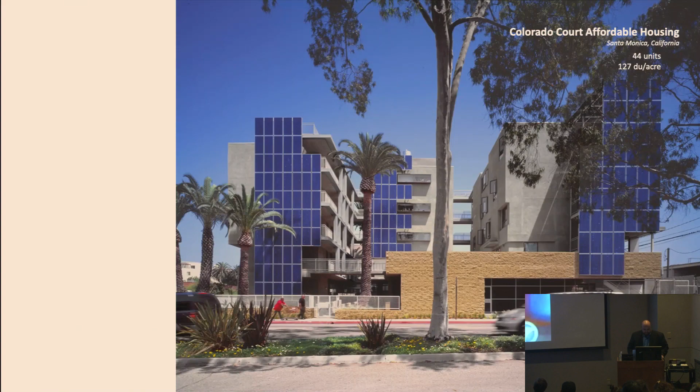It is nearly 100% independent from the power grid. It was built by an architect who specializes in... A new building that is energy conscious is now going up in Santa Monica, and it's getting a lot of attention. Channel 4's Patrick Healy is there. At first, it appears to be any new apartment project, just another building noisily being put up on a Santa Monica corner lot. But Colorado Court is in the... One of Leo's personal passions is finding out ways to provide environmentally safe housing to low-income families. Take a look. We're standing here at the first green affordable housing project in the country. This is Larry Scarpa, the architect. Why don't you... You get the picture, right?

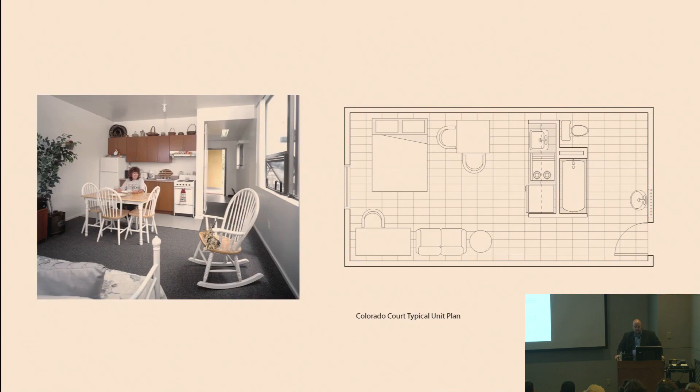It was kind of tremendous that it got a lot of this attention for what was one of the first affordable housing projects in the city of Santa Monica. We were really investigating this tight, micro unit development before micro units even became a kind of fad. But this was the best way we could build affordability. Interestingly enough, this building was designed to be completely off the grid. 100% of its energy needs were produced through the building, most of it through a micro turbine on the roof, and about 20 to 30% of it through PV panels.

If you know how to design in a passive way, that was the first strategy we had here. Anybody ever heard of alphabet buildings? We used to design buildings before air conditioning in alphabetic shapes as plans. This is one of those kind of buildings, and the building has zero AC in it.

It's actually only about 2 blocks off the ocean, so that's one of the beauties of working in California that I don't quite have in Florida. We have a little more humidity and heat in Florida. But this building was really designed to kind of shade itself, to create a brise-soleil.

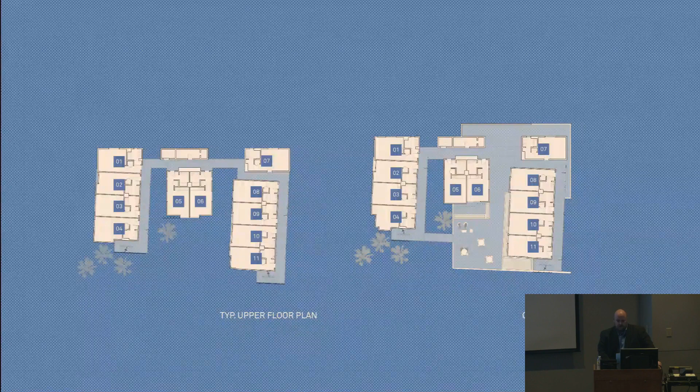Here's that alphabet shape, this one was formed in an E pattern. We always think about sustainability and these integrated practices our buildings should develop. So you see the photovoltaic systems, the shading, the way we could harvest rainwater, thinking about stewarding that on the site, as well as materiality and other aspects.

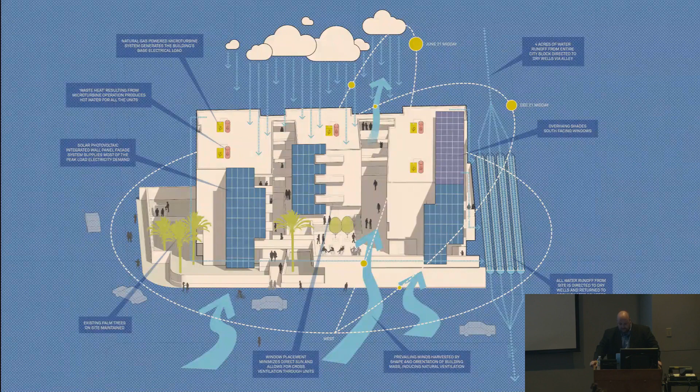That was the huge challenge, but it was the way that the codes, the regulations, and all of these things that get in the way sometimes of our design got in the way of this project. Even though we were doing the best things, it won all of these awards.

So Larry and Angie, interestingly enough, formed a nonprofit organization called Livable Places, where they started writing policies to begin to think about how we capture and adapt the built environment to allow for something more than just a single family residence, but also how we begin to think and plan for the town, a kind of townscaping. How do we begin to look at walkability, livability concerns, and integrate those?

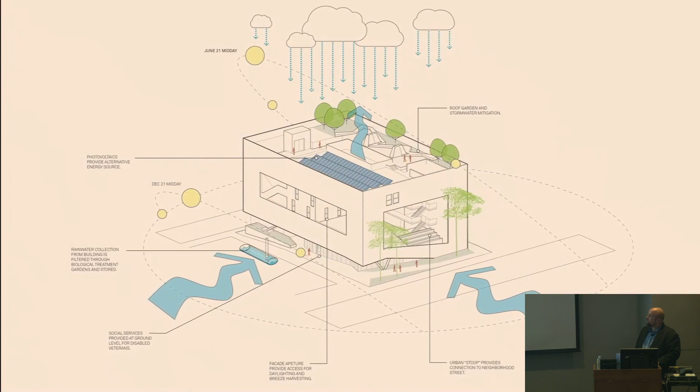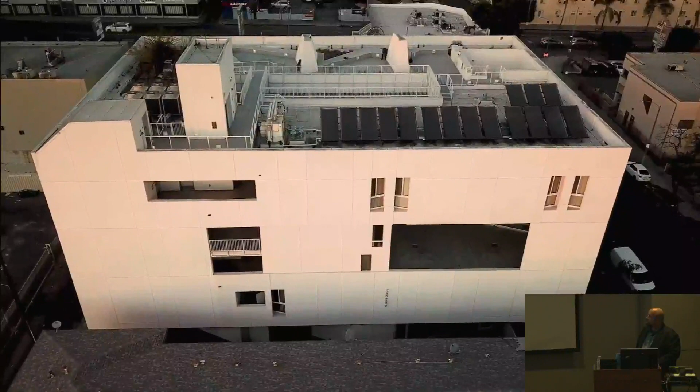Design can be used creatively as a solution to ending homelessness, no matter where it exists. So this is a rectangular shaped building on a rectangular shaped lot. Nothing terribly unusual about it, pretty commonplace actually when you think about it. But I think it says you can do something really imaginative and creative in crafting that solution, even on a plain old apartment building lot.

Angie mentioned that the facade of this building is actually a space, which is the first time I heard her describe it that way, and I thought that is really interesting. The facade is actually a space. This is a great looking building on this block, even without homeless folks in it. The fact that homeless people live here, I think, once again promotes a very positive depiction of what supportive housing can and should look like, in my opinion.

I used to sneak into McDonald's and stuff, like after the restroom, and go in there and take a bath. My pride was really bad, to just go and say I'm homeless.

This building is marvelous. So I have family come visit. We have a community room. Like, you want guests, your guests don't have to be inside your home. They can be inside the guest room, enjoy your company for a couple of hours, and send them on their merry way. We created an aperture which was lifted up above the street so that it appears really open. There's a visual connection to the street, but not necessarily a physical connection. You can come up on the roof and just relax your brain and get your thoughts out and make yourself better. This building right here will make you a better person.

So we're really architectural critics. The thing about this work too is that we're always looking at precedents, and courtyard housing in Los Angeles is absolutely fascinating. It's pretty fascinating in most tropical as well as the kind of climate that Los Angeles has, in the sense that they really create a cohesive unit. It's almost like a handshake measure, another layer that comes from the street to the home itself or to the unit. So we're always looking at how do we layer space, how do you create these kind of handshakes.

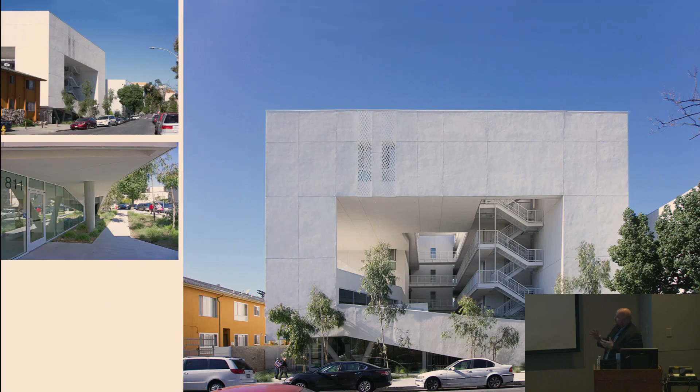You can see some screens—some buildings have them, some don't. These are some of the elements we were able to add back in once we realized we had some budget or money left over to do that.

I'm going to talk a bit about the Cherokee Studio. This is where we were really trying to experiment with how to make an interesting building—how can the building change and have this kind of ephemeral nature to it?

So just a simple structure of these louvered screens allowed us to open and shut and close, creating a dynamic where the building could change over the course of a day, months, or years, and opening up to allow for that ground floor use.

These were, again, courtyard buildings, but there are lessons we learned even on this one. We had a developer who was in a budget crunch during development who wanted to just take the screen off. We said okay, sure, we could take the screen off, but that's where all the architecture is. We showed him what it looked like.

He said, wait, since we now have all this solar heat gain hitting the building, we need to redo our energy calculations. We found it would cost $100,000 to put this screen on, both the front and back, east and west side. It actually cost another $150,000 to upgrade the mechanical systems without that screen, plus some other added costs. So the client ended up saying, for $100,000 I get this, and we were able to show how you value architecture.

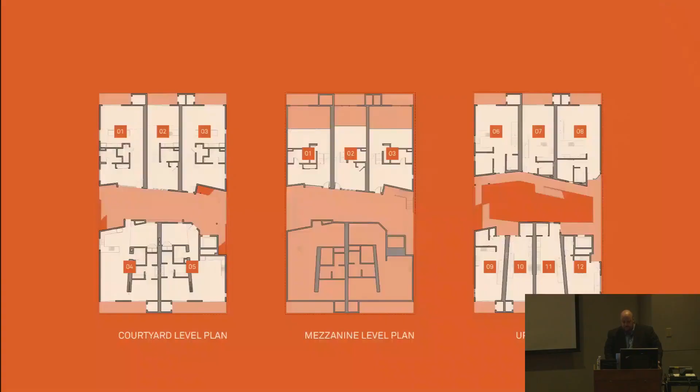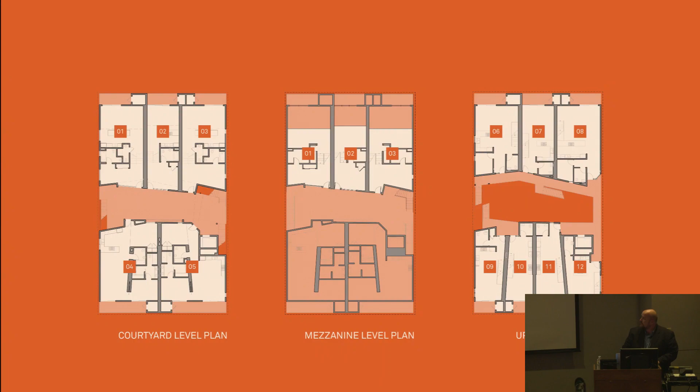So these are just some of the floor plates. You see there were single-story units and double-story units called maisonettes, with a courtyard in the center. In the front and back are those porches covered by the screen. And this is just an interior shot.

What's interesting is you came up to the third floor of the unit, then went downstairs to your bedrooms. The other funny thing we did was recycle skateboards for the backsplash of the kitchens, one of these fun elements where we're trying to recycle materials and get them integrated into the design.

One of the things Skid Row Housing asked us was to innovate, and one of the challenges was to modernize buildings. We were asked to modernize this building, which doesn't always have design, but we were trying to find whatever we could as a design option. This was from the 1920s and was being utilized for affordable housing.

It had these courtyard elements that we were really interested in as design opportunities. Even though we were upgrading some of the mechanical equipment, we found these courtyards as that kind of primary space.

This is one courtyard we came into, which was really being used as bike storage and had some seating, but we got it to where it still had outdoor seating. The thing is, it was the fire egress, so we worked with the fire department to get these stairs up against that wall, and then a gate to get outside. It was a very simple feature we designed to get this in, really making it a piece of furniture for the community.

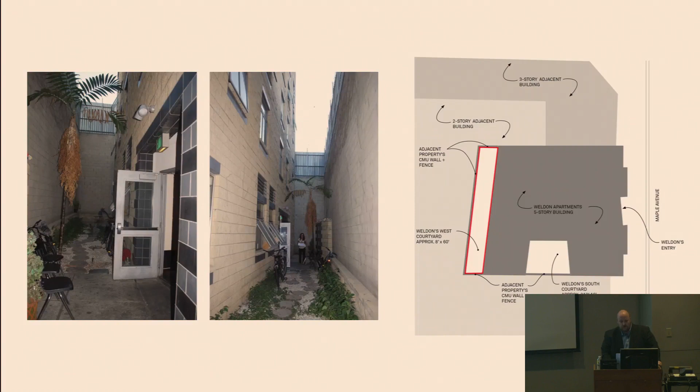Then there was another slotted courtyard, which was really just a trash hole. Everybody was throwing trash from their units into this space. This was where everyone went to smoke cigarettes, even though they weren't allowed to, and it was just a really dismal, trash-collecting space. You can see it's pretty tall, pretty dark and grim, so we were trying to figure out what we could do to begin to upgrade that.

So what we did was, first thing, redo the ground to make it actually live seating areas and paint it white, and have these potted plants we designed to hold. In each unit, there were potted plants, and what we were trying to do is make all the residents have one plant they could kind of hang out with. That didn't work so well, but they found a few residents that would take care of all of them.

You can kind of see that we were trying to reorganize the bike racks and other elements in here, really through very small means, exploring opportunities in this project, to the point where there was also a collective cooking area, this commercial kitchen we went ahead and revamped as well. You can kind of see that last courtyard I was showing through the doors there.

So all of this really created this kind of communal space and opportunities that they could then leverage and use. Now it's heavily used, it's a loved space, and it's become more popular, and not so much garbage being thrown into it anymore.

A project we just recently finished is called the Rose Apartments. It's 35 units, and it's actually done for transitional aged youth. If you're not familiar with that term, the issue we have in homelessness is that the homeless population isn't always adults - it's a lot of children, especially under the age of 18, that are going homeless, and they transition from 18 to 25.

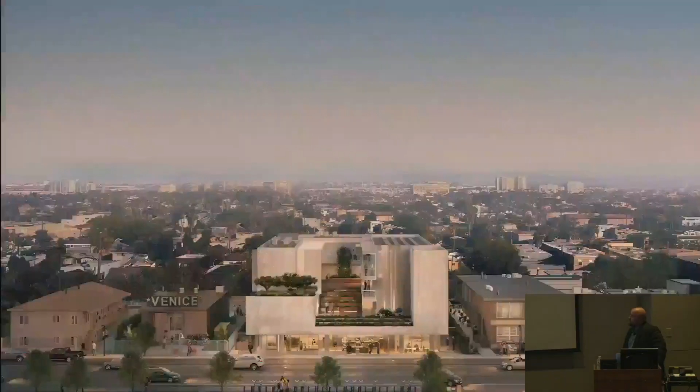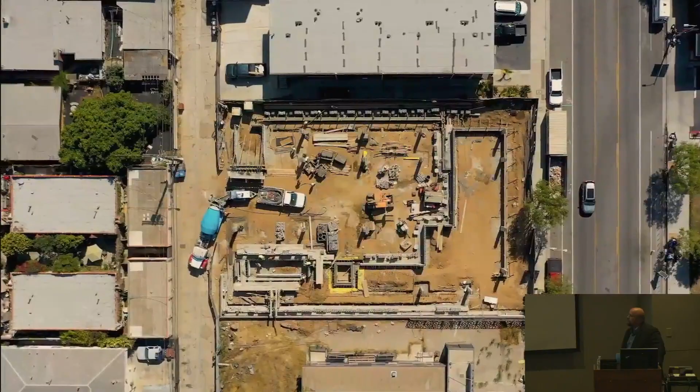Doing affordable housing does not just happen overnight. Rose Apartments is, first of all, the first ground-up construction that has happened in Venice in over 20 years. The second thing is that Rose Apartments is 100% supportive, and that is a huge deal in the city of LA. Rose Apartments is going to house 35 families. Half would be for families and individuals who are experiencing homelessness.

There are folks in the community that don't want developments like this to happen. They have a lot of perception about unhoused people living on the street currently and how they transition into housing. They have a lot of negative thoughts and ideas about who are living in our buildings, and these things are just not true. We're excited to be able to give some unhoused folks the opportunity to live by the water and experience the beach, to have the same experiences as everyone else in Venice.

So I was always fascinated that you had this thing, NIMBYism. I never heard of it until we went to these public or community meetings here on this project, where it was just like 'not in my backyard,' amplified to build nothing anywhere at any time.

This was kind of that quintessential project she was talking about. There's been nothing in Venice Beach built from the ground up in the last 20 years - it's all primarily been renovation work. So this was a key project for us with this particular housing authority to build these units.

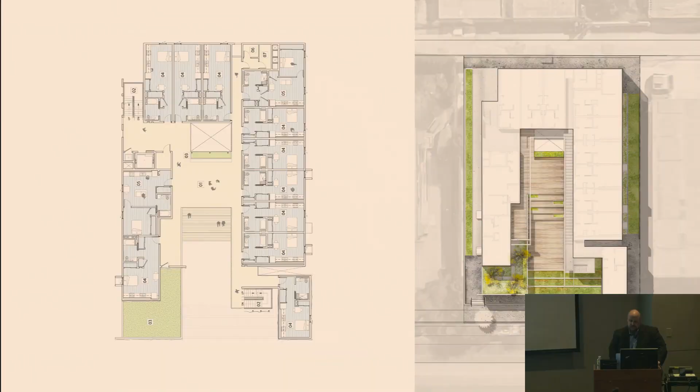Here's some other images of that courtyard space that's heavily used. Everything actually fronts that. Nothing really fronts the street. They all front the courtyard, and then the courtyard fronts the street. So you're just getting some views from that over top.

But what's interesting is, when you look at it from the street level, it really feels like a sculpture. It feels like this kind of sculpture element. And it's kind of funny, you can see a little bit of the sparkle grain we've put into this building.

Larry always said when he opened up, he wanted to be playing Liberace as you walked down the street, because it does sparkle in the sunlight when you're walking by. But we were really trying to think about it as a public art piece that people could enjoy, so you're almost living in art. That's where these volumes and other elements became more volumetric rather than mass.

Just some other images showing some of these aspects, where we're even thinking about how we tie the land into the building, keeping it as simple as possible and as affordable as possible.

And so this gets some incredible views. I call it the Pope's pulpit up there at the top. You have incredible views back to the ocean, but also to the mountains beyond, the mountain range or the hills beyond. Here's another view looking back from that area.

All of this has kind of coalesced around this idea that we began to pull together through research of this density exhibit that we put on, which really allowed us to explore, analyze, and reflect on our own work, just like any art gallery or art studio would have with these kind of exhibits.

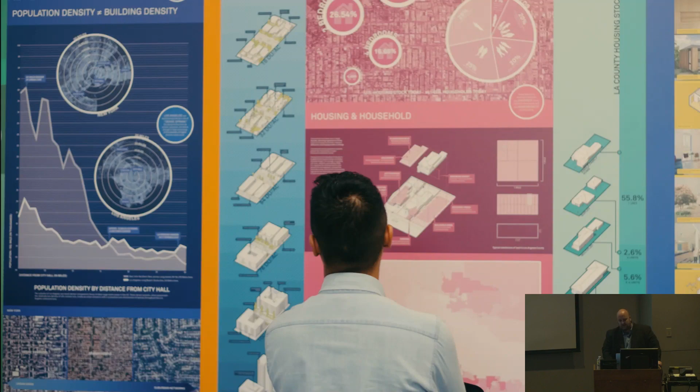I'm always fascinated when we get into these conversations, because density always becomes a bad word, but we really need to look at density. Maybe we use a different word, intensity—some even use that term when talking about FAR, floor area ratios, referring more to the intensity of building uses. But I want to point this out, and this has been an amazing statistic from a report that came out of New Urban News, of all places, back in 2010.

What's important to note is at that point, the tax base for the buildings and that density starts to pay for basic infrastructure. What we don't always think about in cities is that unless we have these 2, 3, and 4-story mixed-use buildings, the type of land use and tax base you're getting never recoups enough to pay for basic services like police, fire, water, sewer, let alone fixing potholes.

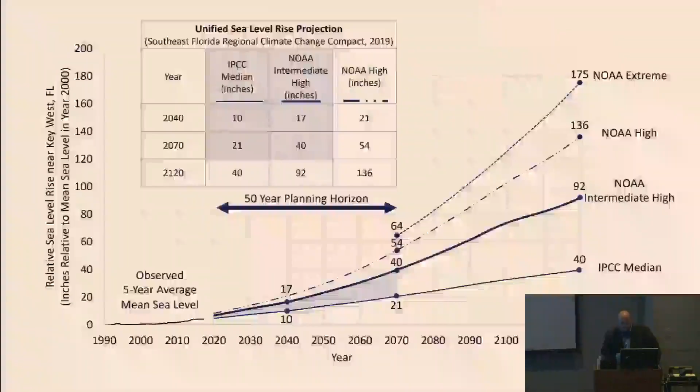Oop, I don't know why I just did that. That's crazy. It was weird.

I'm going to touch on something I added just here at the end. I wanted to talk about where we're engaging in South Florida right now on a project I refer to as salty urbanism - that's its pedestrian term. It came out of research I've been doing through the academy, but also with our office in professional practice, and we're really trying to bridge that. As I pointed out with the regulation and policy changes on the housing projects I talked about at the beginning, we're trying to do that now also within the broader built environment.

Salty urbanism is a pedestrian term for what the project calls ADAPT, an acronym for a design and planning tool for these coastal areas and how we begin to think about them.

It's doing it again. It's crazy, I hope it doesn't. I'm going to try to advance it a different way next time. Nope, didn't work. I don't know why it's doing that.

I apologize, but I wanted to put this out - it came from Zillow. If we had just 6 feet of sea level rise over the next 50 to 100 years, we're going to have 2 million homes at risk. If you look at my state, Florida, half of those homes are in that state alone. This is really going to become a challenge for us as we advance into the next few years.

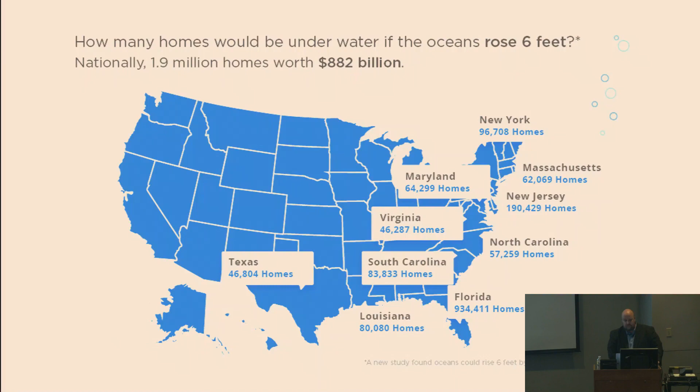It's doing it again, I'm not going to stop that. I don't know why. Maybe I'll just skip it all.

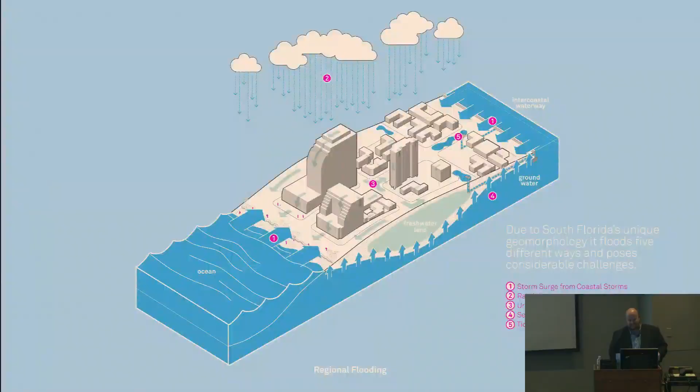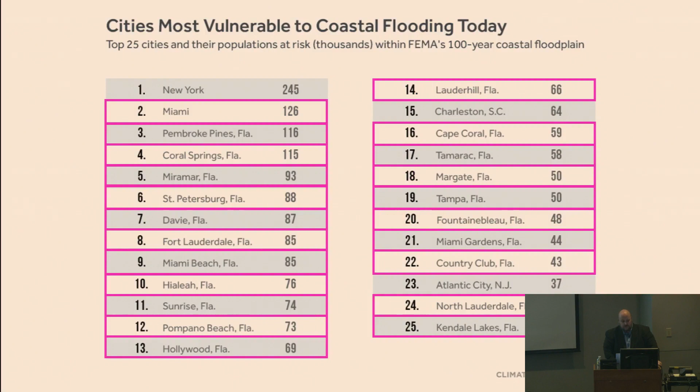This is going to skip, I can tell you right now. See? Yep. But the point is, I'll advance it - we're having all these challenges.

There's the seasonal high tides we call king tides. This is the roadway during one of these king tide events right now - an abnormally higher tide. The streets do this, and just like you'd see with boats, we put out signs now like idle speed, 5 miles per hour. Funny thing - a guy who owned a Ferrari sued the city of Fort Lauderdale, saying they ruined his Ferrari because he drove through salt water. It went into this huge thing, but ultimately it was ruled an act of God, the city couldn't be sued for it, and the guy got angry and moved away.

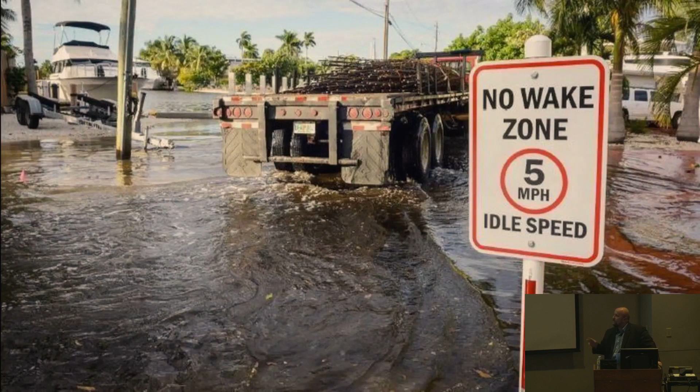But the funny thing is, in these communities that are very susceptible, Fort Lauderdale is going to have to figure out how to adapt. Interestingly, Fort Lauderdale is always kind of the redheaded stepchild to Miami, and specifically Miami Beach gets a lot of attention, but Fort Lauderdale is even lower and has a lot of these basic issues.

This is a storm surge like we saw with Irma - something we could pretty much see with Ian if it gets close enough, or elsewhere. I am trying to get back home at some point, but this is kind of the interesting thing, and again I apologize for that.

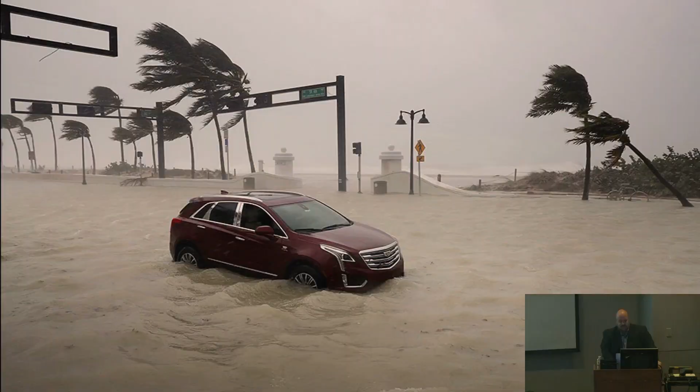We had just spent about $30 million renourishing our beaches before Hurricane Irma. This is what happened about three months after that renourishment.

The reason it happened is because we got rid of all the dunes, which are essentially root dunes. We call them sand dunes, but they should really be called root dunes, because the roots are actually what holds the mass there. All this sand came about two to three feet of it over onto A1A. This sand could not be picked up and put back on the beach because now it picked up all these hydrocarbons and became a toxic, carcinogenic mess and actually had to go to a landfill.

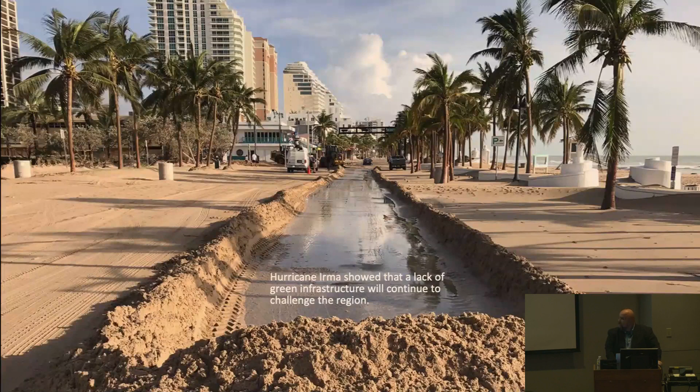You can see how we spend money and how we think about these things that are going to become challenges in the future. Part of this project was to really think about, not necessarily inventing new ways, but how natural systems used to work in this community.

And so, it was just after Hurricane Irma. This was 7 inches of rainfall that fell in an hour period of time in South Florida, and you can kind of see the devastating aspects there.

Oh gosh, all right, I'm getting sick of it.

If we can figure out how to not let the built environment become a toxic mess because of the flooding and everything, this is going to be a challenge.

One of the things we asked in this project was, if this is truly what is happening, let's think about a scenario vision for it. Let's not think about this as a problem, but as an opportunity. How do we begin to think about future heat and future flooding in a different, more creative way that allows a different lifestyle to emerge, one that may live on with and over water?

That was a series of workshops and exhibitions that we curated throughout the communities to have this long conversation about what this could be. There were also collaborations in different design studios at USC, University of Southern California, as well as University of Kansas and Florida Atlantic University, all collaborating to develop this with multiple design and architecture firms, like our firm, to coalesce around a vision.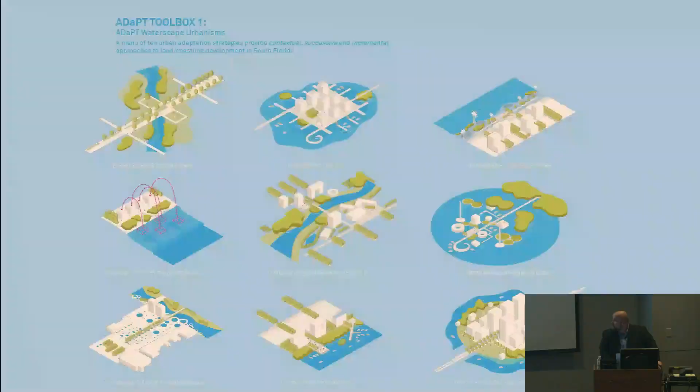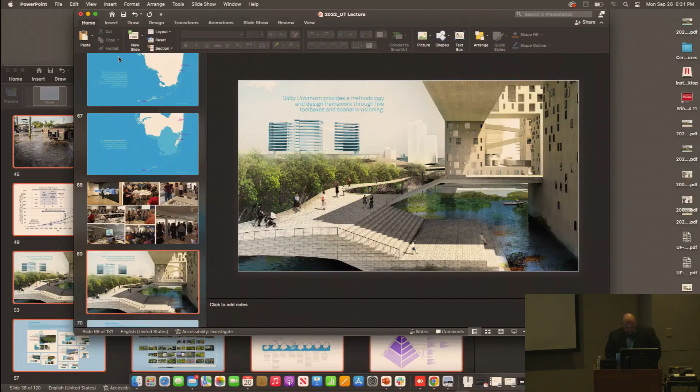Wow, I don't know why it's doing this now. Now I'm getting angry. Sorry. Let me do something else here. Let me just see if resetting it works. Nope, all right. Oh boy. Yeah, this is not the one I wanted. Apologize, having technical difficulties.

I'm going to try to just do it as best I can. So what this really wanted to be was a new methodology and a framework for how this idea of salty urbanism could coalesce around 5 different elements.

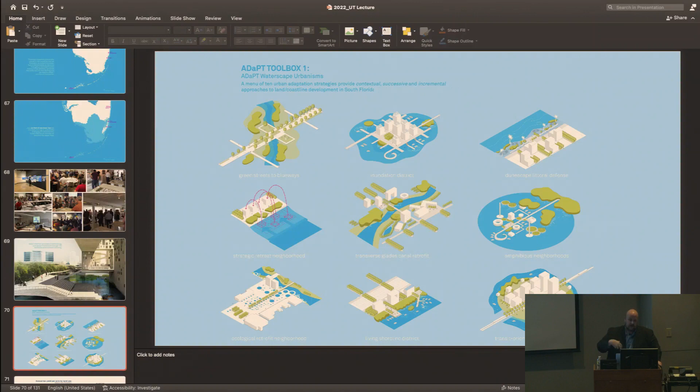Those elements began to become, one, an adaptation toolbox around what we call waterscape urbanisms. How do we begin to think about the built environment that was there now, and how do we retrofit that, as well as think about new developments that may be coming in the future? Again, how do you live on, with, and over water? How do you create floating structures, or move things to higher ground, and other elements?

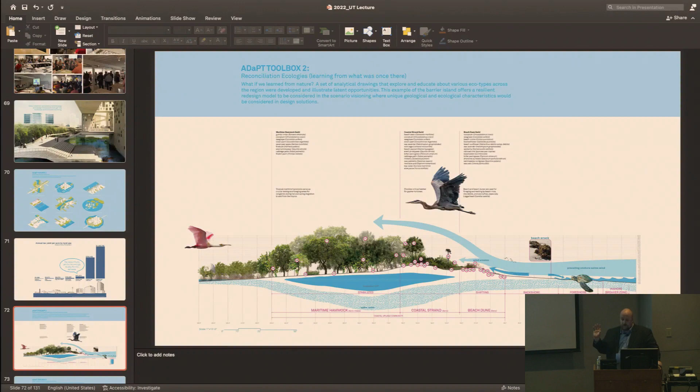Then we created a second toolbox, which was just looking at forensic ecology, trying to figure out what was once there before. So we understood the hydrology, ecology, and geology of those specific areas. In this case, it happened to be the barrier island that we were working with.

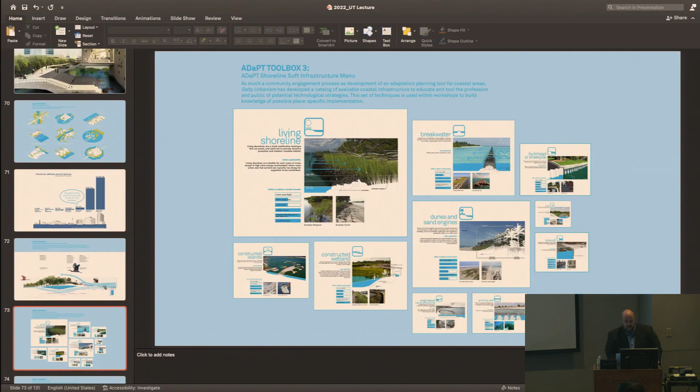The third toolkit was looking at what kind of infrastructure adaptation technologies we had at our disposal that we could explore and utilize. This included things like living shoreline, breakwaters, and other elements that were commonplace. There's nothing novel about this individually; what was novel was putting it all together as one integrated system.

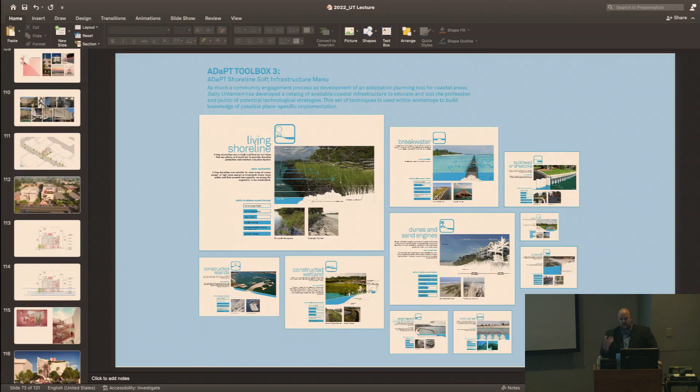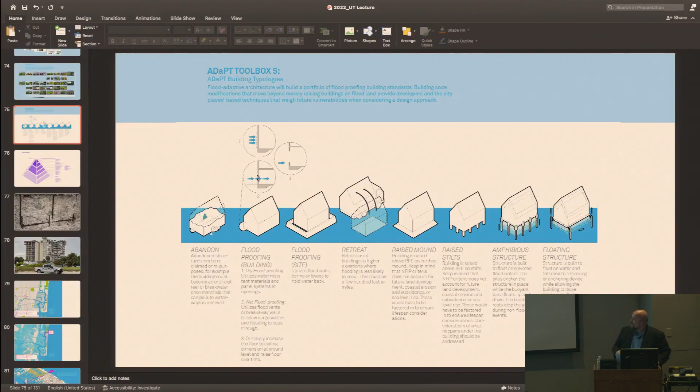The fifth and final toolbox looked at flood adaptive architecture—everything from abandonment, thinking about the materials in the ground so if it floods we could just leave it in place. Those materials need real consideration, avoiding carcinogens, toxins, or anything that breeds bad stuff. You can couple that with landscape architectural elements or phytoremediation to clean the environment over time, all the way to floating structures, with everything in between developed as well.

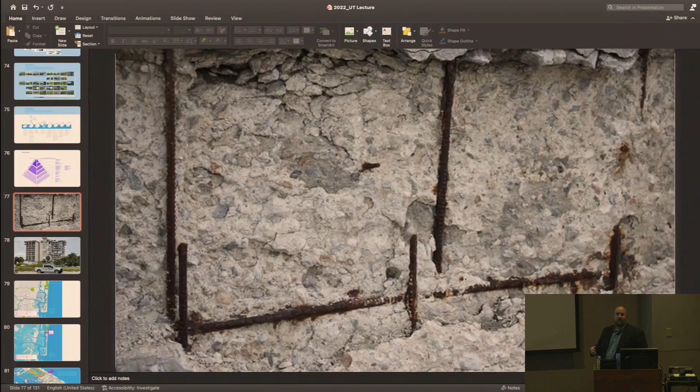We started looking at material tables, which became critically important—something we're working on now even in our own office. You've probably seen these images of spalling concrete, where the rebar inside starts to break off and expose itself because it doesn't have proper coverage.

If you know Surfside, this is one of the things they're now pointing to. More evidence is coming out about weakening due to rebar exposure, erosion, and fluctuation. Rebar is fine if it's totally submerged all the time, or never submerged at all. The problem is sea level rise—rising seas mean that inundation is starting to happen in basements and building foundations.

This is why we go through 40-year certifications and recertifications of buildings now, and that law is even changing. Just like after Hurricane Andrew, when we got a radically new Florida building code hardening buildings to withstand hurricanes up to 185 miles per hour, we're now seeing buildings needing innovative new materials. We're looking at fiberglass or basalt reinforcing as alternatives, but it's not currently allowed in the Florida building code, so we keep going back to the Florida Building Commission and Tallahassee to ask for the ability to design more resilient buildings.

Ironically, we're designing buildings to handle flooding, to let water flow through. But the long-term effects of corrosion and erosion, especially with hotter temperatures, only accelerate the chemical erosion of that concrete and the rebar inside it.

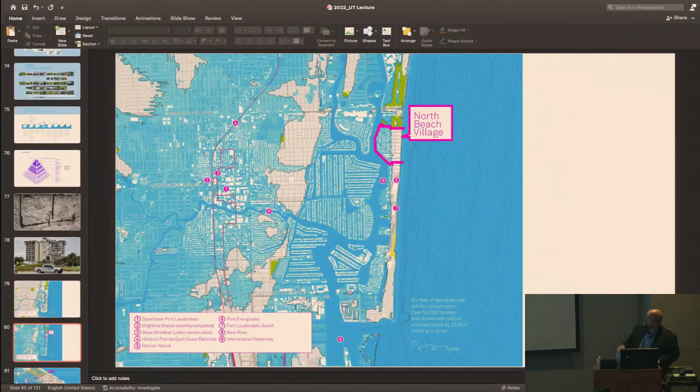This is downtown Fort Lauderdale, the beach and everything—this is what happens under 6 feet of sea level rise, permanent inundation of downtown. I always say Fort Lauderdale is the redheaded stepchild; it never gets the attention, but you can see that coastal ridge that's left. So we started exploring North Beach Village and adaptation activities there. It was a good spot—on the barrier island, with the highest elevation in Fort Lauderdale at 14 feet right up against the beach, down to one of the lowest elevations at 2 feet above sea level on the western side.

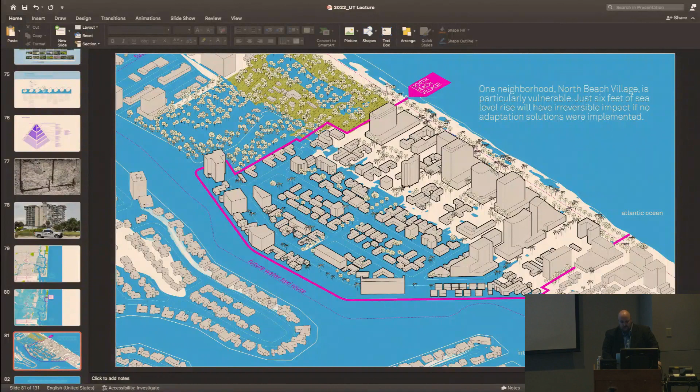So what's projected here is at 6 feet of sea level rise. The whole western edge of that community, or that lower half, gets completely inundated permanently at that level. So what we were coming up with was strategies to look at what do we begin to do for the next 10 years?

We worked with the city of Fort Lauderdale, with students, faculty, and professionals to start thinking about botanizing the asphalt of North Beach Village, as we called it. They had huge amounts of impervious surface—in some cases about 90% impervious surface in this neighborhood alone, between rooftops and the asphalt around it.

So what we wanted to look at was what the city had to do first, and how they could become role models and best practices, showing low-impact development features like rain gardens, bioswales, salt gardens, and these other kinds of landscapes that we could integrate in.

Then over time, in phases one, two, and three, it could be what private practice could do, and they could choose one of those. One was like a green jacket—how do we armor around the outside edge. The second was just moving away from the most vulnerable areas. And the third was taking what they branded Fort Lauderdale as the Venice of America, and taking them at their word, actually creating a kind of island district and edge.

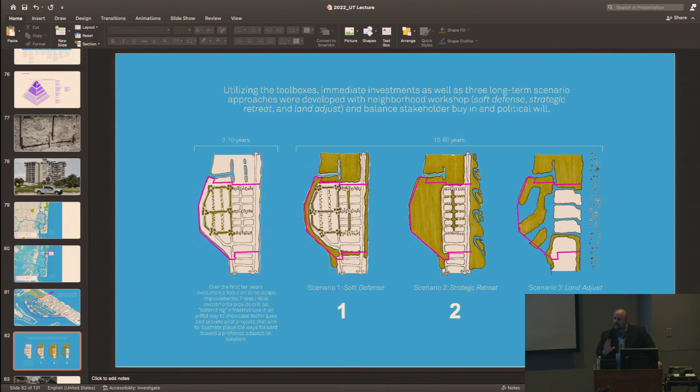So what we were looking at was developing the shade street that would go ahead and allow for more walkability, and you're seeing that on the edge.

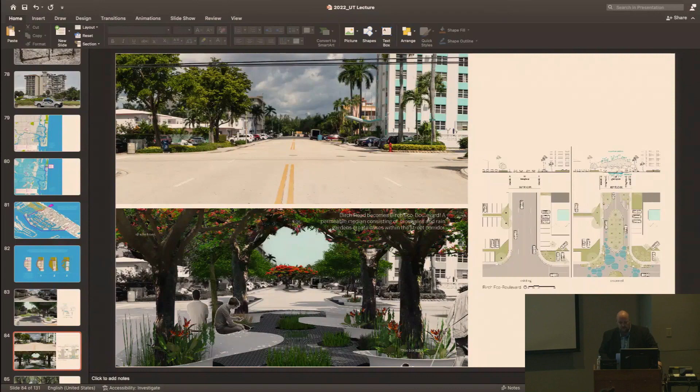I always point this out because it's something I talk about a lot to cities and especially to AASHTO and other organizations like the American Association of State Highway and Transportation Officials. Has anybody ever read the Green Book from them? It's good bedtime reading. It's actually the document that governs the design of our streets throughout the United States—doesn't matter where you are.

But the Green Book is only ironically called green because it's nothing about sustainability or green practices, okay? It was just because they didn't have any other color available the day they went to the printer, and the printer said, 'hey, I got green,' and they said, 'that's great.' So it became known as the Green Book.

But in the Green Book, they call trees FHOs—fixed and hazardous objects. They call sidewalks auto recovery lanes. So it doesn't bode well for pedestrians in this book.

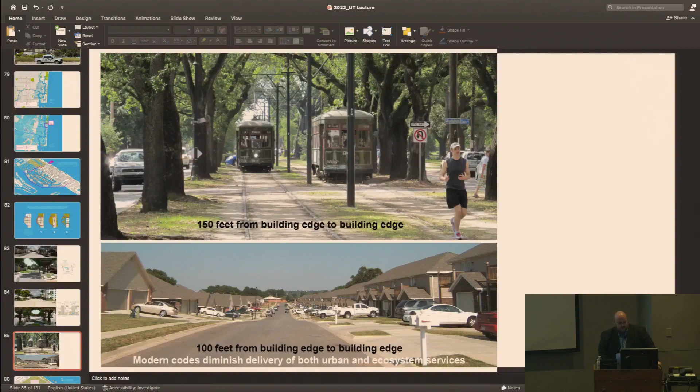But I always find these places interesting because you know when it's garbage day, right—all the garbage cans are out there. You can see they got rid of all the trees because they were FHOs, because clearly somebody's going to be driving pretty fast down these streets. It's become a real challenge working through communities on these aspects.

So this was one of our missions—talking to the city about how to begin thinking about streets in a very different way, with green infrastructure, ecological infrastructure, versus the typical hard or gray infrastructure, and even thinking about the larger community. If anybody's ever tried to get a permit through the Army Corps of Engineers, it's like getting a federal act of Congress done.

It takes so long to get a permit for anything in a navigable waterway, you could be there for 10 years. So one of the things we had to talk to the community about was giving up the 300 feet next to the waterway of their built area and retracting it to kind of create this green jacket.

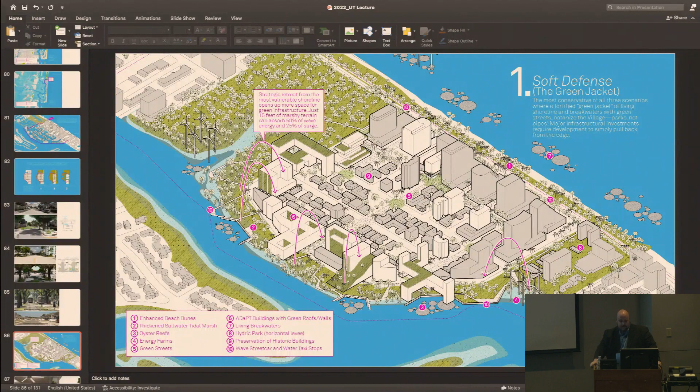Where we saw the 300 feet coming from is because we could really begin to absorb a lot of storm surge and deal with a lot of wave energy and other things, as well as create some living shoreline edge that also elevated the real estate development, raising the land values around there.

That was an interesting aspect, just kind of showing that it doesn't mean you couldn't build architecture in some of those zones. It just means you built differently. You'd have these elevated structures or buoyant kind of docks that could be there, where maybe you pulled up with a boat rather than a car.

And then we had the second one, strategic retreat, where from that western most vulnerable area we're kind of redeveloping it as a mangrove forest, but also transferring development rights to the higher ground at the ridge. These were just some of the things we could begin to look at and investigate.

One of the things we found working with some of the scientists and ecologists was that wading birds, these birds we all see as iconic in South Florida, like the egret, the anhinga, and others, were going to be decimated because their habitats would cease to exist as rising seas happened too fast.

So that's why we had to have these kind of floating grassland habitats through there that would actually allow for it, but we could also have amphibious architecture or floating architecture in there.

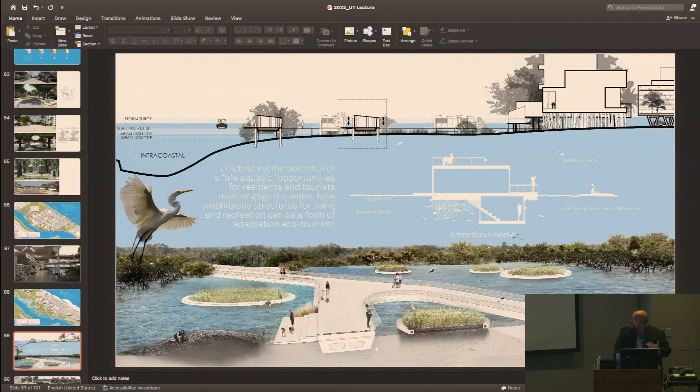Everybody always asks me, how do we deal with the Florida state bird, the mosquito? Well, there are ways, because it's one of the reasons we got rid of all these mangrove forests throughout South Florida. And you've probably heard about Zika and other airborne diseases that could easily be transmitted by these guys.

We began to look at how to deal with mosquito management through purple martin bat houses, but also as dragonfly habitat. Dragonflies, ironically, eat more larvae of mosquitoes than any other insect, apparently. So we were trying to say, here's what you would need to begin to cultivate.

And then you can kind of see the sand dunes coming back, or those root dunes, as I was mentioning on that lower image, and thinking about even sand engines coming back to that kind of area.

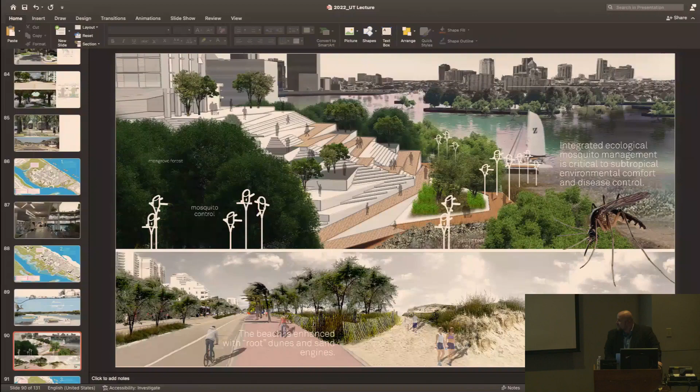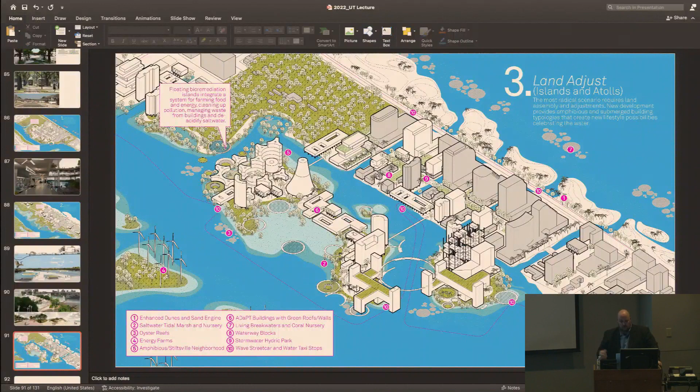The third and final one was again that kind of land adjustment, which had the duality of both urban and ecosystem services—the fact that it was urban created economic benefits and higher costs of properties along the water's edge, but ecologically, the more shoreline edge you have, the more ecological services you could have.

This is where some of the students started investigating architecture and how you can raise that up over time as the seas rise. They worked through that.

We came up with an ecotypic framework. We started to look at a design and construction manual for the city of Fort Lauderdale. It was ironic because it's just recently been codified, but it's actually for their entire public realm that Brooks Scarpa did.

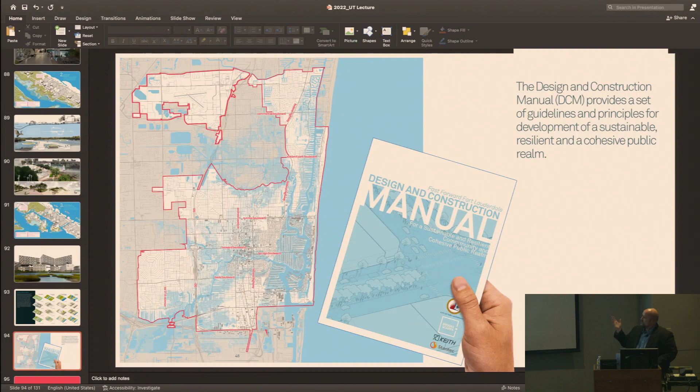It's called the Fast Forward Fort Lauderdale Design and Construction Manual for a Sustainable and Resilient Community and Cohesive Public Realm—a long-winded title I always loved saying, and had to remember. We call it the DCM for short. This was really to help them spearhead how they looked at open space, streets, frontage, parcels. I'll move through these pretty quick.

We were looking at open space, and how to begin to plan and design for that.

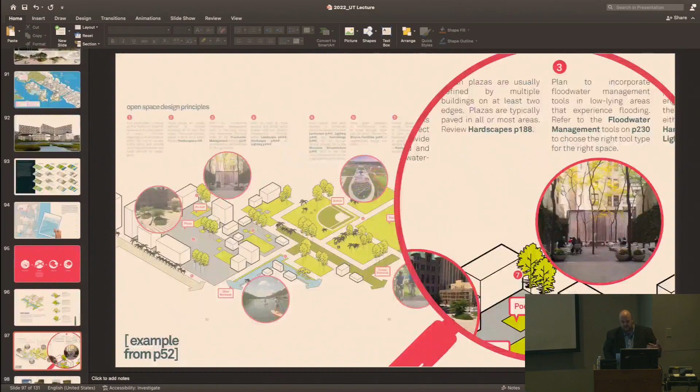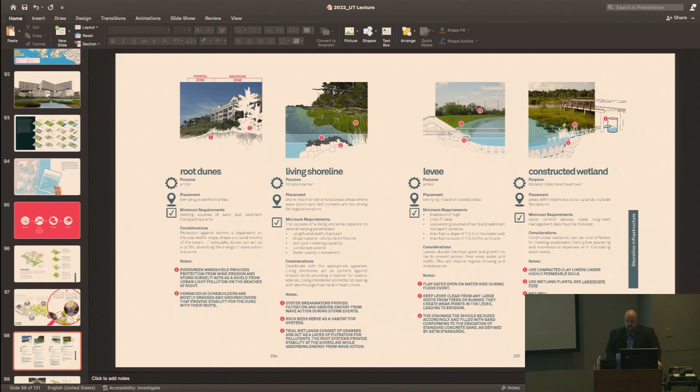But also, just like you saw in the previous example of the Salty Urbanism Project, we started to show how these root dunes, living shorelines, and other elements could work, what their costs were, what their purpose was, to really give a tool for the entire city. Because it's ironic, if anybody's ever worked with a city, you usually work with a singular department, and that department doesn't talk to the other department, who doesn't talk to the other department.

So this manual was not for the public. This manual was just for the departments to talk to one another and begin to develop the same language, a cohesive language across them, even talking about how do we promote place and identity, healthy and active lifestyles, focused development, flood protection, and flood and heat protection across the public realm, specifically in streets as well as other parks and parcels.

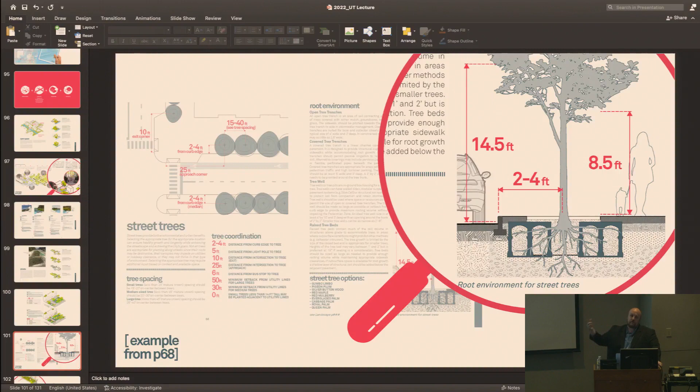Usually the infrastructure maintenance programs have much healthier budgets than landscape programs in most cities. And so that's a huge issue. If we start to see landscape no more as ornament, but more as infrastructure, I think that's a tremendous windfall that we're going to start to see moving forward, as landscape must become infrastructure in our cities.

And so we explained a lot of these different things, but then started tying it back to policies around architecture, even talking about how do we begin to design architecture in the public realm to coalesce around these projected rising seas.

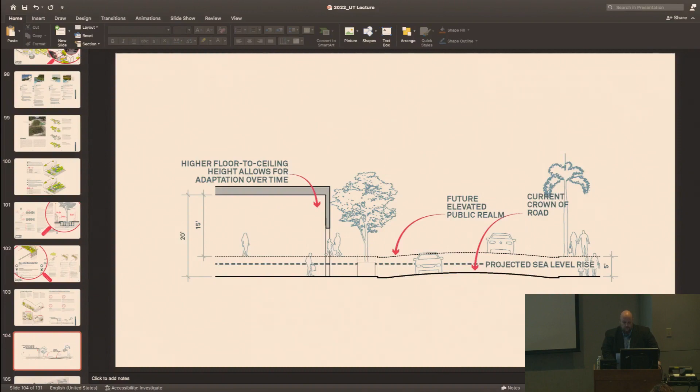And so even just doing simple things like changing the way we built the first floor heights from 15 feet to 20 feet, we immediately could build in 5 feet of adaptation. When a street had to be raised, the building could then be raised also without having to raise the entire building—you just raise the ground floor inside that building. Coming up with concepts like that are now becoming part of the zoning code in Fort Lauderdale as well as Miami Beach. And so we put it all together in this kind of book.

And so I'm going to end the talk kind of where we're at today. We're doing about 139 units of senior affordable housing amongst 3 different projects in Miami Beach. They just all happen to be on basically 2 man-made islands.

Normandy Isle, you can see the pattern of it. It's just called Normandy Isles because there was, I guess, a French developer that came in and thought, you know, we'll name every street Marseille, or Rue, and we'll just kind of have a cool day, right? This was built in the 1920s, 30s, and it's one of the more susceptible areas to sea level rise today.

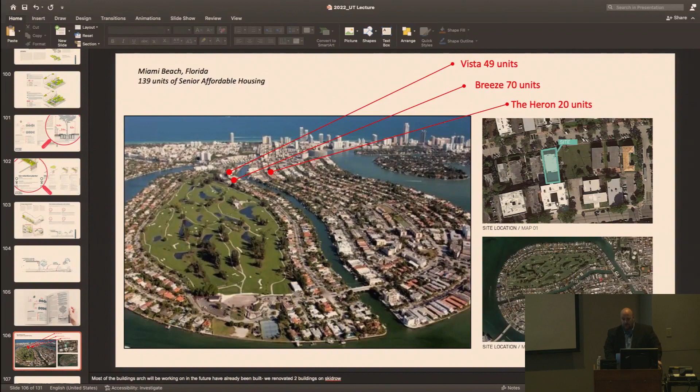And so when we were tasked with these projects, it was like, how do we begin to think about, one, the architecture, the historic architecture that was once there. It's mid-century modernism, which is pretty ubiquitous in this area of Miami Beach, because this is North Beach.

Most of you probably know the iconic South Beach, the Art Deco wall of the 1930s. Well, most of the rest of Miami Beach was built in the 50s and 60s after World War II, and this was the kind of architecture of the place there. This is literally the courtyard building that's about 2 courtyards or 2 properties down from us, and so we were like, how do we begin to design and think about in that same similar element?

And then you do see this iconic Art Deco. But the reason I show this is I was always fascinated growing up in Miami. And when I first got to see an Andy Sweet exhibit—how many of you have ever watched the documentary The Last Resort? It's all on Andy Sweet's photographs, which unfortunately, he was brutally murdered in his 20s.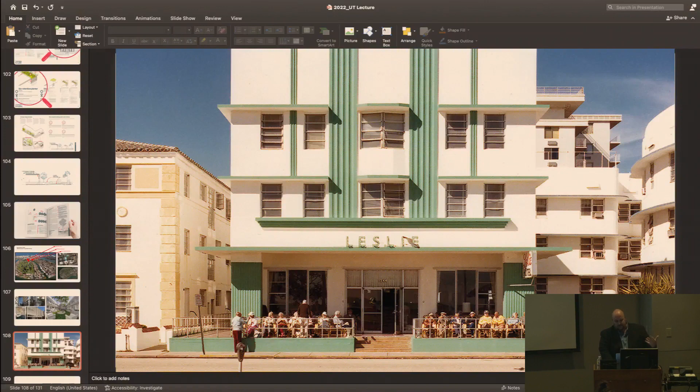But he would go around Miami Beach in the 70s and take all these photos when Miami Beach was primarily an elderly community—it was a retirement community. And so you have all these great porchscape photos of elderly people hanging out on these porches, kind of surveying. And so this became another one of those motifs, or a concept that we wanted to pull into these projects.

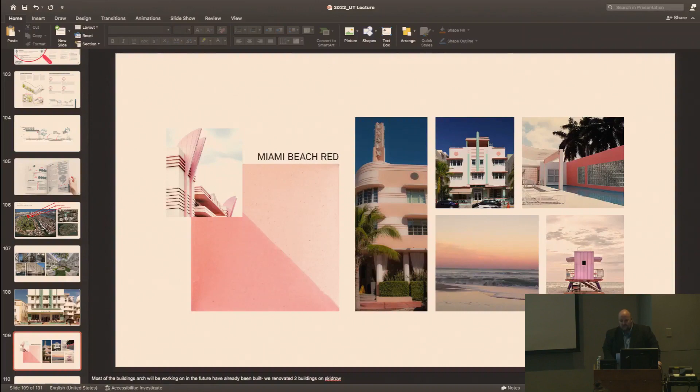And we were also fascinated with the Miami Beach Red, which is technically pink, but they call it Miami Beach Red. We really liked those kind of aspects in that breeze block, again, this kind of vernacular style. So we kind of coalesced all that into what is essentially a dumb box with a great wraparound porch and a great kind of skin.

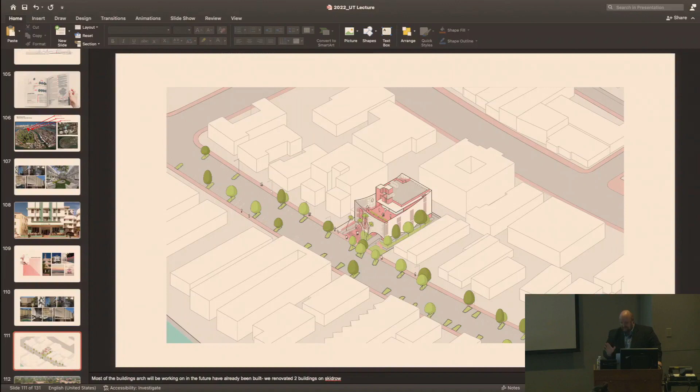And this is the sketch that Carl showed. It's also a few sketches I gave. You did get the only sketch of another building today, but that's okay. But this is a kind of aerial shot of it, and you can see this is called the Heron.

It's 20 units of elderly affordable housing. So the ground level, interestingly enough, is just a parking area and a porch. And the upper 3 levels are where the housing is, and then there's a community room on that 4th level where you see the kind of planting.

So we really were thinking about how do we also create walkability. It's elderly, disabled elderly at that. How do we get them to possibly not use the elevator? So we strategically designed the stairs and everything just behind that breeze block element on the left-hand side, to encourage this kind of walking up and down — what we saw as a social stair, a social street for the community that would move from that community center down to the ground.

This is why it becomes so critical to begin to bake in this adaptation. One of the things I didn't talk about is we have a unified sea level rise projection down in South Florida that takes all 4 counties — Monroe, Miami-Dade, Broward, and Palm Beach — and unifies around where we see these projections going.

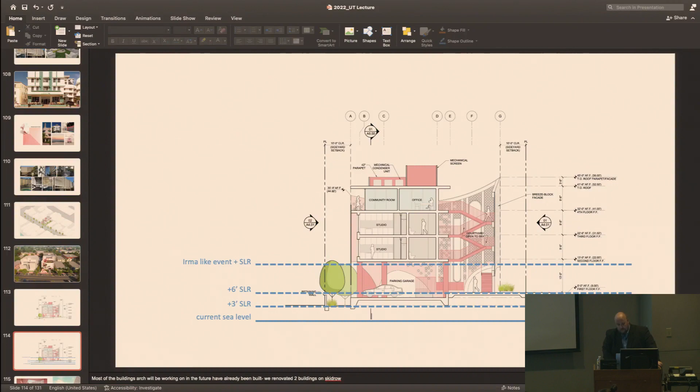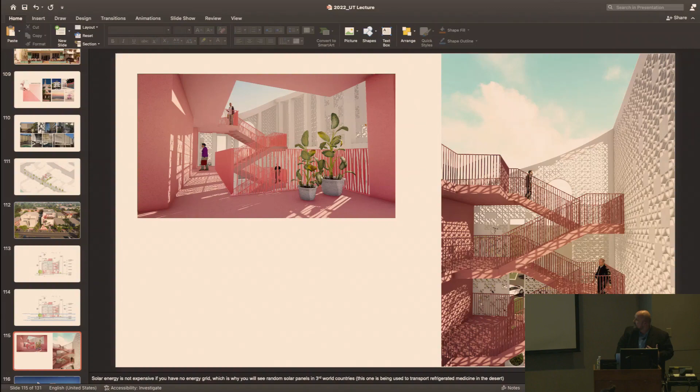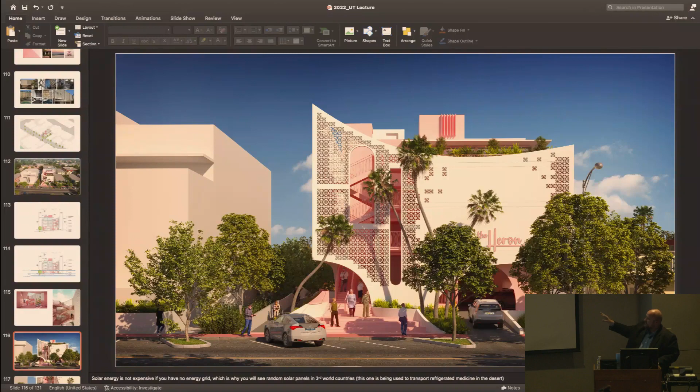But there's also some other elements, but we're really trying to make and dress the building to have at least some street presence, but also kind of shading it and other elements like that. And so you can kind of see this.

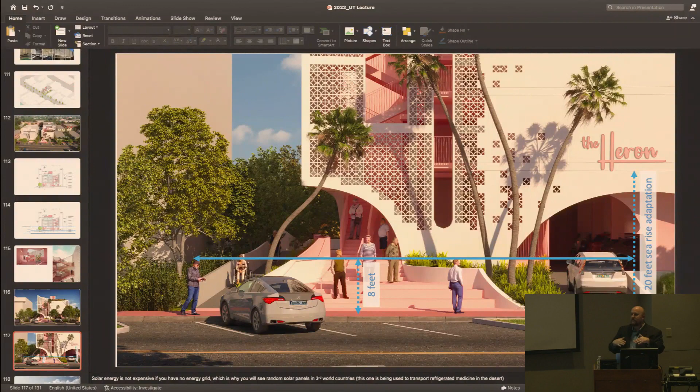One of the critical aspects is we have to design this building to accommodate the street being raised 8 feet over the next 10 years. So the building had to be designed to mitigate what the city's going to eventually build it up to, and tie it in. What we've planned is that happens right at that terraced level, so it almost feels like it was meant to be when the street actually gets raised. There were a lot of different challenges we had for that.

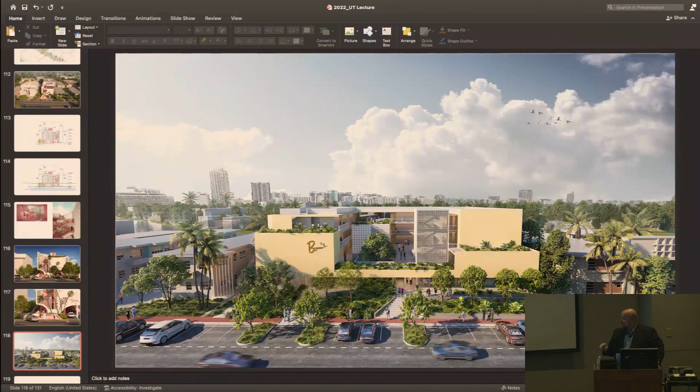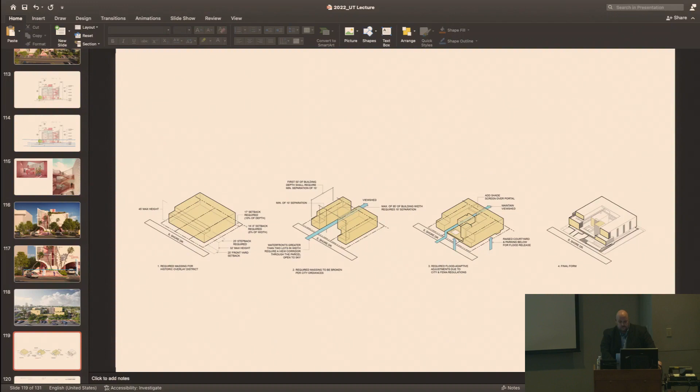Just some of the last projects I'm going to talk about are the Vista and the Breeze project, on Miami Beach again in the same neighborhood. It's 2 different projects, 119 units total, but the Breeze is 70 units, and it's actually located on the water. We took it on to be similar to the city of Miami Beach vernacular of these courtyards, like the courtyards I was talking about from Los Angeles, and flood adapted it by building that courtyard up to the 2nd level, much like some of those Los Angeles projects where you have tuck under parking below.

So this is that courtyard level again. You can see how the units aggregate through the sections, and where we're really thinking about the crenellation and the massing and volume and how you read that from the street scale, because this is where one of those NIMBY 'bananas' neighborhoods was too.

So we were really trying to work out some of those notions, but we even developed a landscape palette for that, and something we really wanted to advance is the Atala butterfly, this endangered butterfly that thrives on this coontie type plant. We wanted to make sure we integrated that to build on and ensure we were providing habitat.

One of the things we were trying to do is we had to build a new seawall. We couldn't afford that, and we would also have to get a permit from the Army Corps of Engineers, and that could take a long time. So what we decided to do was give back 10 feet of the land to the waterway. We're going to build the new seawall 10 feet in, and let the old seawall just fail gracefully, letting it become this kind of littoral shelf for a tidal garden.

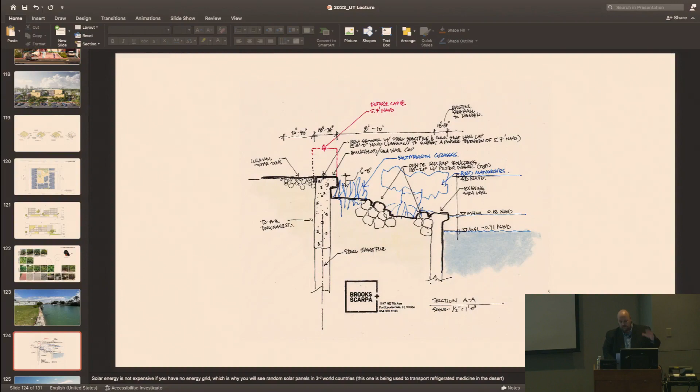That's what that tidal garden would look like over time. You can see some of the existing fabric next to us and how we're trying to adjust as best we can, dealing with the future climate crisis coming there. Really, again, looking at how the landscape and the architecture begin to work together as one cohesive unit.

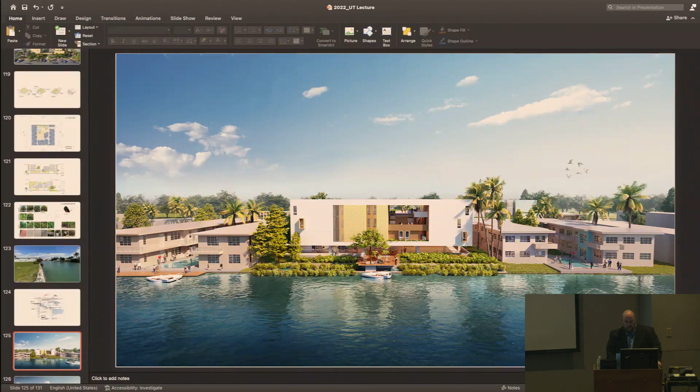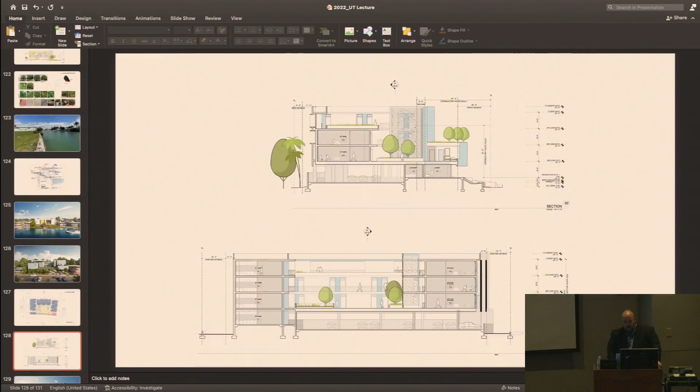Then we have the Vista project, which is across the street, similar in scale and courtyard, but this is about 49 units. Again another courtyard building, and then the view from above, looking back at the street. Just pointing out, they're going to come in and raise this street too, about 5 feet, so it hits that same mid-platform on the walkway or these stairs too.

So you can see we're 10 feet above street level on these, and we're really trying to mitigate this idea of how do you get people up there, how do you work through this. Here's the other image from the other unit, but you can see the 2 projects are kind of catty-cornered to each other. And that's it.